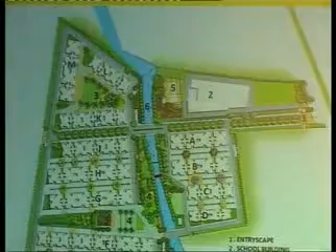What cuts across the site is the Nala, which we are going to develop, with a school and blocks on either bank. That's the site layout, showing 2 bedrooms, 1 bedrooms and studios.

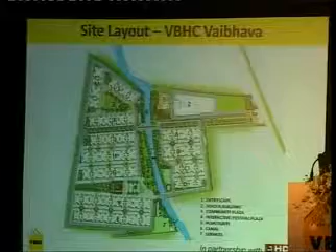Number 2, on the far right top, is the school. Number 3 is the commercial plaza—a nice open space around the shops on the triangle, offering spillover space for activities, where people in the apartments can spend very pleasant evenings.

A few views of the model apartment and the physical model—you can take a look after this—but that's really the commercial plaza where we expect a lot of activity and vibrancy within the community.

I think one of the central principles of Geddes that we are all very excited about is that the end result of all planning is the joy of the community and the people who live within it—it's not just buildings, it's not one thing. It's important that the well-being of the community is protected, and that's what we are focused on here.

Green footprint: 33% of the site is physically covered with green. There's 23.5% which is buildings, and the rest is green cover, semi-porous surfaces, and a few hard-top roads. So the idea is to increase the green footprint and keep the non-porous surface to the minimum.

That's the view at the entry when the project is done. The school has independent access from the main highway. You have the central road and the street typology—a nice 12-meter boulevard with central planting, and then smaller streets. The peripheral road will be mostly where the traffic should be, and the inner one should be free of a lot of traffic. That's what the studio looks like.

I think what we've been keen on with the design is to ensure large windows for adequate lighting, good ventilation, and the need to have not just a room with 4 walls but a balcony or some sort of semi-indoor outdoor space. Every apartment comes with its own balcony.

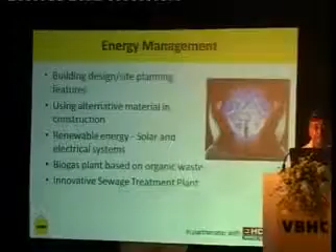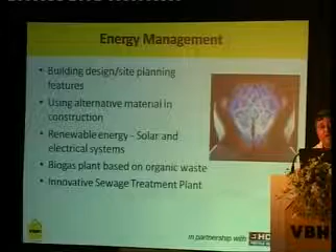Even in the water treatment plant, we have done a fair amount of innovation to get something that can work with a very low level of electricity.

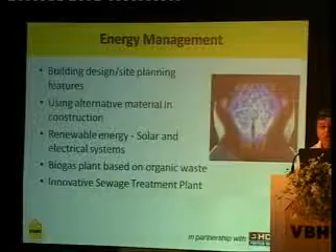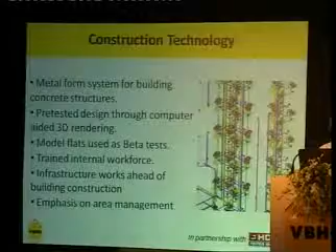Finally, we did discuss the construction technology, and you did see the slides on it, but before that, a series of processes. First, everything we do is in 3D, and we have a completely visualized, simulated version of our project. So we can simulate, add elements, see how it looks, and get customers a view of it, and so on.

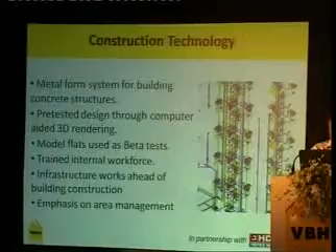The model flats used as beta tests, so by the time we come to actual construction, we've pretty much mastered and convinced ourselves that every element of it is in place.

Our infrastructure work in terms of roads and all other facilities goes ahead. Although traditionally, if you see the payment plan that's laid out, it's on plinth area, first floor, second floor, third slab, and so on. Nobody speaks about infrastructure, and it often comes last.

In our case, infrastructure comes first, and finally there's emphasis on area management. And that, ladies and gentlemen, is the final price point: the carpet area, the super built-up area provided to you.

The basic price varies from 4.5 lakhs to 9.92 lakhs. There are a few flats at 10.24 lakhs. Then you've got the government charges, and other charges mostly paid to the government, resulting in a total cost of ownership that varies from 5,52,000 to 11,82,000.

The 2 BHK type E units are very few, about 4 per building, so it's not really representative.

At this point I'd like to conclude and just say one word: acknowledge. A lot of people have helped us come so far, but a couple of people I'd like to mention specifically: Mr. Nagendran, General Manager of HDFC, and Gaurav Arya, my friend from HDFC PMS, who have particularly been of great support in putting this program together for us.

Our suppliers, vendors, our consultants, our architects, and just about everybody, and also a lot of encouragement from people who have interacted in the media.

So with this, I'd like to conclude that we'll get the Vaibhava project up quickly, and we do believe very strongly that people who live here will live happily ever after. And we stand true to the name of being high on value and low on budget. Thank you very much.